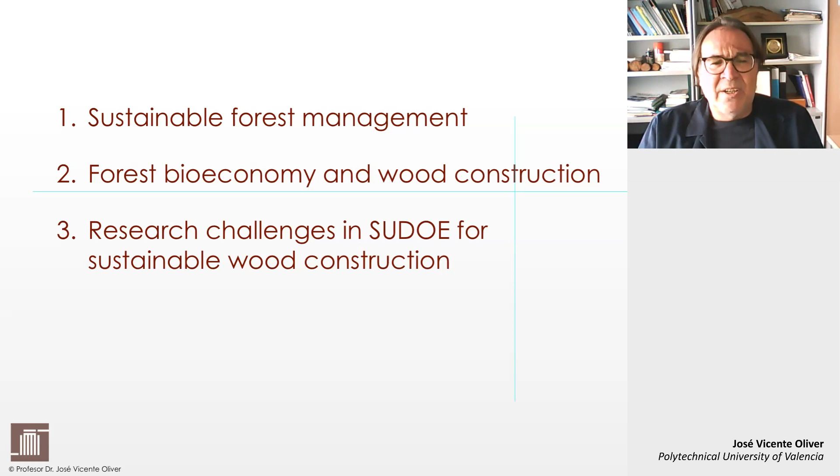So if we begin with sustainable forest management, we have to go back to 1713 with Hans Carl von Carlowitz publishing his book about Sylvicultura Oeconomica. That means the first publication regarding the forest sustainability principle.

Von Carlowitz was a mining engineer working in southeast Germany, in Saxony, and he had deforested quite a large area in order to harvest wood for the building of the mines in this area. And knowing that the forest was growing, he thought about the possibility to plan no more harvesting than growing, and that was the principle of sustainability.

And in this book, we have to take into account that we are speaking with the language of the 18th century. Von Carlowitz said, for the protection and cultivation of wood, a lot of art, science, and effort are required to ensure a continuous, permanent, and sustained use. And here comes the word sustainability, what in German is Nachhaltigkeit.

It is an inalienable issue without which the country, in its essence, will not be safe. When forests are ruined, income is lost for many years, and von Carlowitz spoke about 50 to 100 years, ruining the treasury, leading to an acceptable short-term profit, but masking a loss that cannot be replaced.

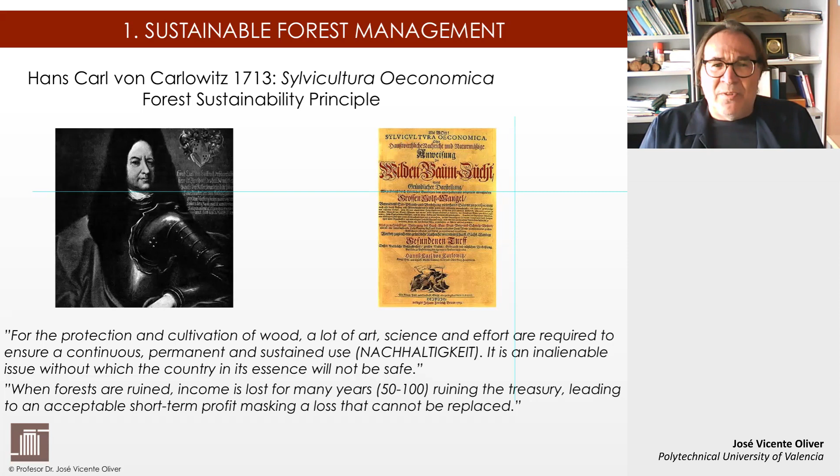So, von Carlowitz described as first technician the principle of sustainability, but from this beginning of the 18th century until today we have different milestones in the development of the principle of sustainability. Sustainability was at the beginning strongly related with the sustainable management of natural resources, in this case especially the forest resources.

But coming to the 20th century, we began different publications and new ideas about sustainability that began maybe with the famous book of Carson, 1962, Silent Spring, over the Ramsar Convention about the protection of different ecosystems, 1971, or in the 80s, 1980, with the World Conservation Strategy, and also 87 with the Brundtland Report about our common future.

And one very important milestone was the Earth Summit in Rio, Declaration on Environment and Development, in the year 1992. The Kyoto Protocol 97 was also very important in order to merge natural conservation and the first approaches to tackle climate change. Different international events have reinforced this sustainability principle.

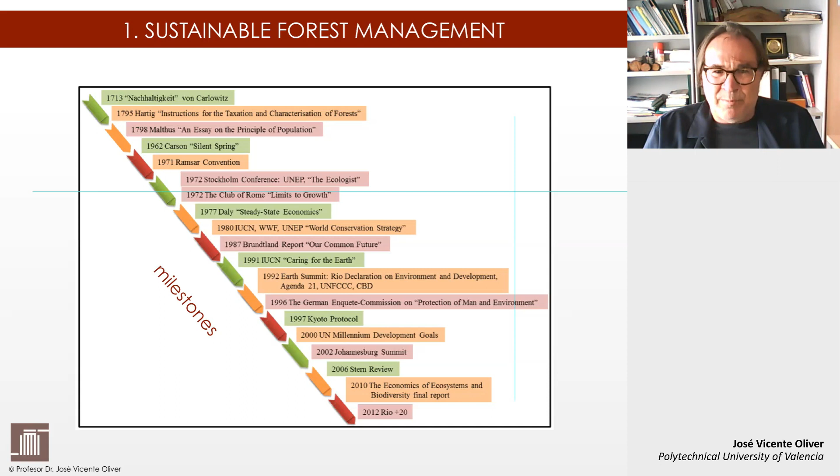Sustainability or sustainable forest management is also quite related to the recent policies against climate change. We had, as you maybe know, a lot of different international meetings in the Framework Convention on Climate Change of the United Nations, what is known as the COP meetings, since 1995 with COP1 to today with COP26, the last

meetings at international level. Very interesting is that especially in COP26 in Glasgow, we saw the first clear relationship between forestry management and climate change. And in this international convention, there was a very important Glasgow Leaders Declaration on Forest and Land Use. It was in year 21.

Over 140 countries, accounting for more than 90% of the world's forest, made this declaration in order to work together to halt and reverse forest loss and land degradation at world level with the scope of 2030. 12 countries announced in COP26 a global forest finance pledge to collectively provide more than 12 billion US dollars for forest-related climate finance until 25.

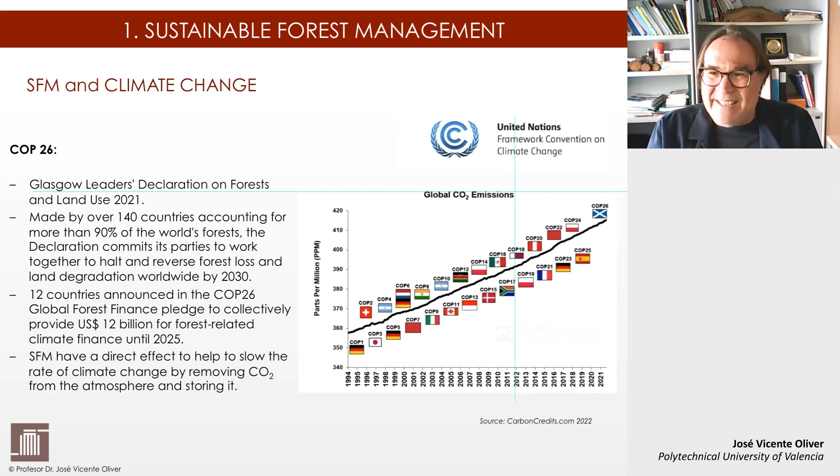And here, I think the most important aspect is that one of the results of this event was that the declaration said that sustainable forest management has a direct effect to help slow the rate of climate change by removing carbon dioxide from the atmosphere and storing it. That means forestry in the center of climate change mitigation, not only adaptation.

Today's definition of sustainable forest management, here a definition from the European Environment Agency, says that sustainable forest management means the stewardship and use of forests and forest lands in such a way and at a rate that maintains their biodiversity, productivity, regeneration capacity, vitality, and their potential to fulfill now and in the future relevant ecological, economic, and social functions at local, national, and global levels, and that does not cause damage to other ecosystems.

So, sustainable forest management is based on the three pillars of sustainability: environmental protection, social and economic development.

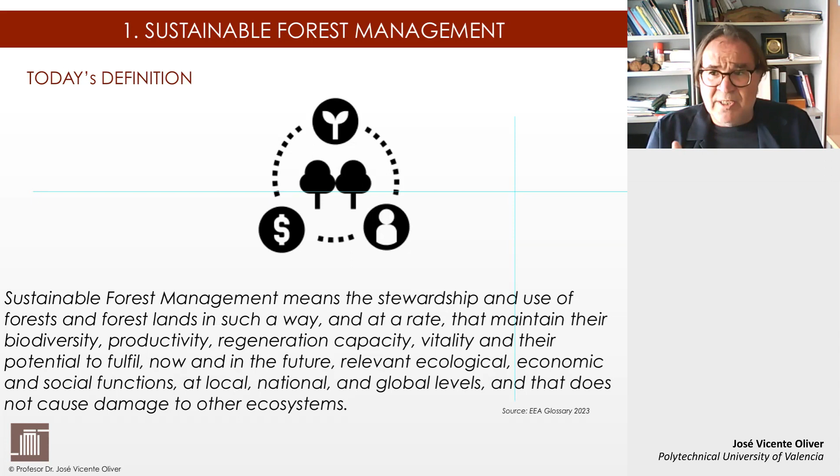Today in Europe, sustainable forest management and the tools that we have for doing that, to make it very easy to understand, is normally oriented to two different models. The first model is what we call the intensive silviculture towards timber production. That means an intensive use of the forest land in order to produce fast-growing trees to achieve large dimensions of wood that can be used especially for forest products or for wood products.

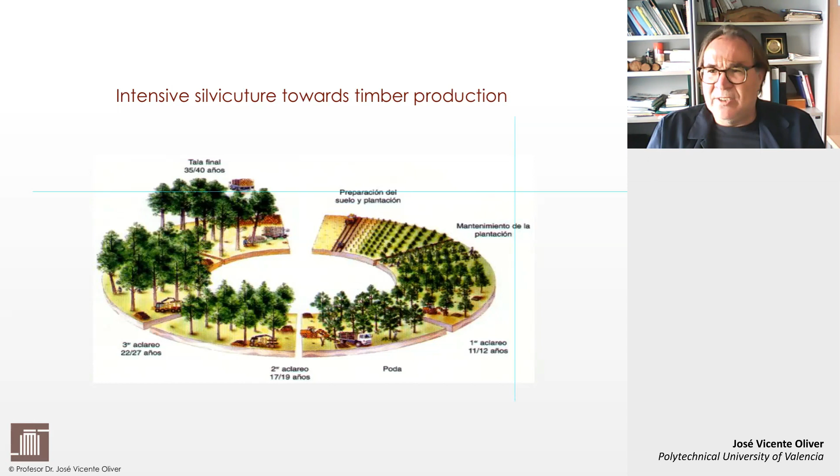That is the model that is very usual in the northern part of Europe, and even here in our area in the southwest, in the SUDOE area, more in the Atlantic area. On the other side, these are combined with another model of protective silviculture towards ecosystem resilience and conservation. That means extensive and very quality-oriented silviculture in order to support and to help the forest ecosystems to be more resilient against natural disturbances.

And here in the Mediterranean area, or in our region in Southwest Europe, more oriented to prevent forest fires, but also to enable these major stands, these major ecosystems, to regenerate naturally and to create the new generation of forests through natural regeneration, and not so with afforestation or reforestation that we saw before in the other intensive silviculture model.

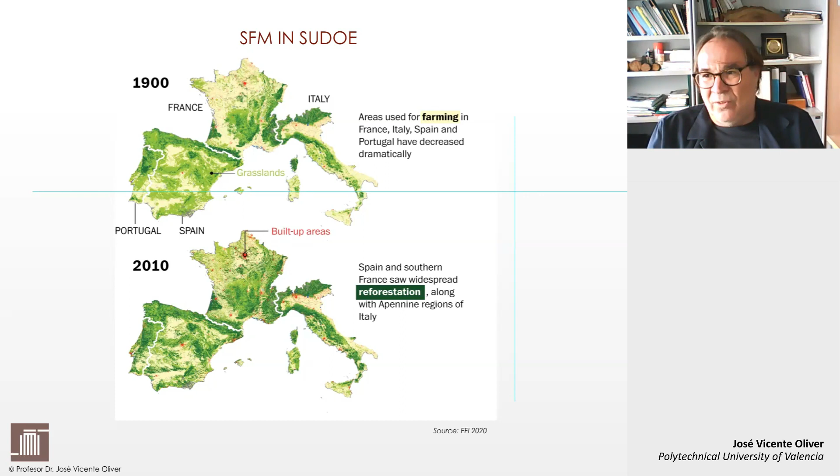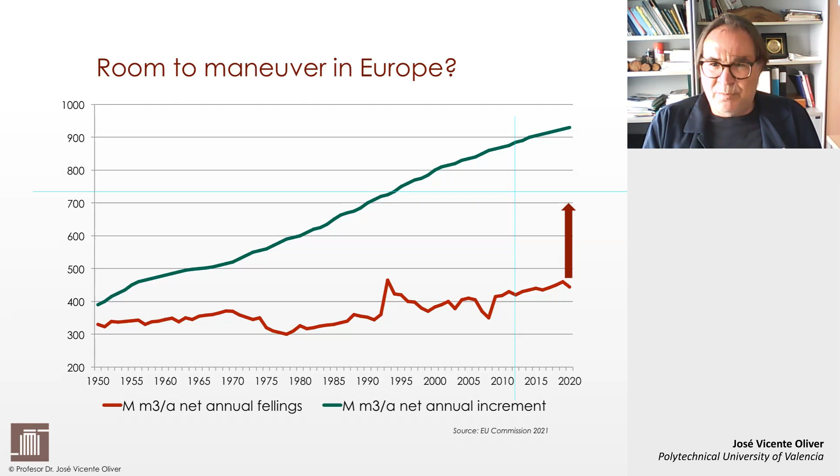If we focus on one representative region of the Mediterranean area of Europe, for example, our region here in Valencia, at the moment we have more than 1.2 million hectares, and the forest cover is almost 60% of the territory. So by far more than the average in Spain and the average in Europe. We have here in our region an annual increase of 3,000 hectares each year. The annual growth is more or less 1 million cubic meters per year for all the forest area. And in our case, we have a harvesting rate of less than 10%. That means that we have large areas that are unmanaged and that are not harvested.

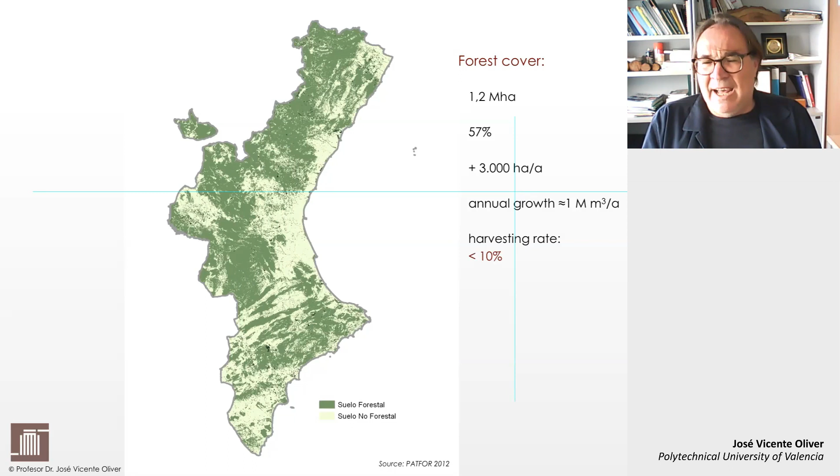But also the severity of these forest fires could be very important in areas with difficult geographical and orographical conditions, and with meteorological conditions, especially in dry and hot summers, to have large forest fires. And that is one of the main perturbances that we could have in order to maintain sustainable forest management and the conservation of our ecosystems, which could be better managed in the future.

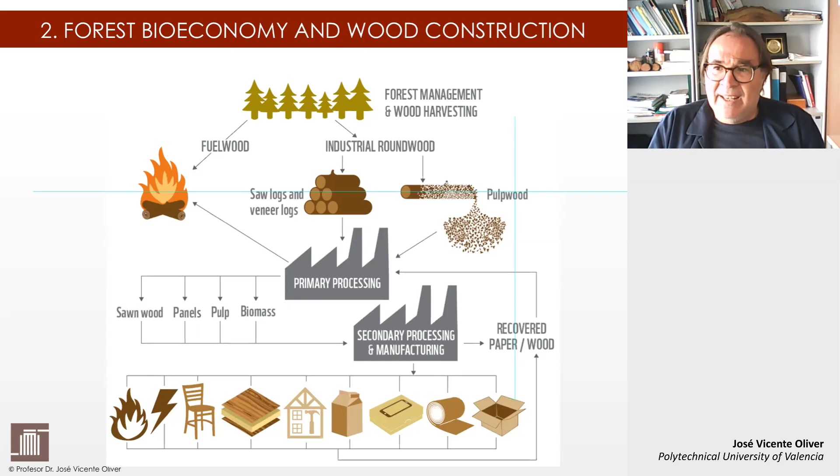On the one side, we have products that are oriented to the construction sector, construction, but also furniture and joinery. Then we have the packaging sector, the paper sector, and also the advanced use of bioenergy, both as thermal energy or power. Very important in the wood sector is that it is a paradigm, a very good example of what we call the circular bioeconomy, one of the main objectives of the Green Deal and the industrial and environmental policies that we have now in the European Union.

As you can see here, the forest is absorbing carbon dioxide from the atmosphere, fixing it into wood, and this wood is used in these logs that we are harvesting from the forest to produce these first semi-elaborates in the primary processing. But during these processes, we are not only producing these semi-elaborates, we are also producing what we call rests. Rests, not waste, wood parts that are not part of this semi-elaborate. These rests are recovered and included in one main use in the primary processing, which is the wood-based panel industry.

The semi-elaborates are passed to the secondary processing, the furniture manufacturing, the construction elements manufacturing, the packaging elements, and so on. And they are producing the final products that we are consuming as society. Also, during this secondary manufacturing, we are creating rests. And these rests are recovered by the primary processing, as I said before, especially in the wood-based panel industry.

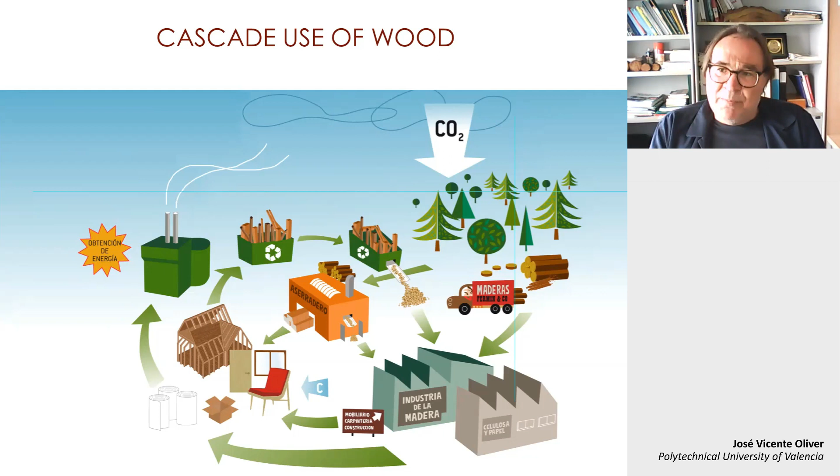The final products, as you can see in the slide, have a life, and after that life, they have two possibilities. Either they will be recycled and integrated back into the industrial production chain, back to the primary processing, especially in the wood-based panel industry, or some of them are landfilled or recovered as thermal energy. This happens in the solid wood chain, but it also happens in parallel in the fiber-based chain in the paper products.

So here is another slide in order to clarify what we call the cascade use of wood. That means that all kinds of resources that we are harvesting in the forest are optimized in their use, following not only the qualitative and quantitative dimensions, but also the possibility to enhance all the particles of wood in different uses. So, for example, large dimensions and very good qualities are oriented to produce solid wood or veneer products.

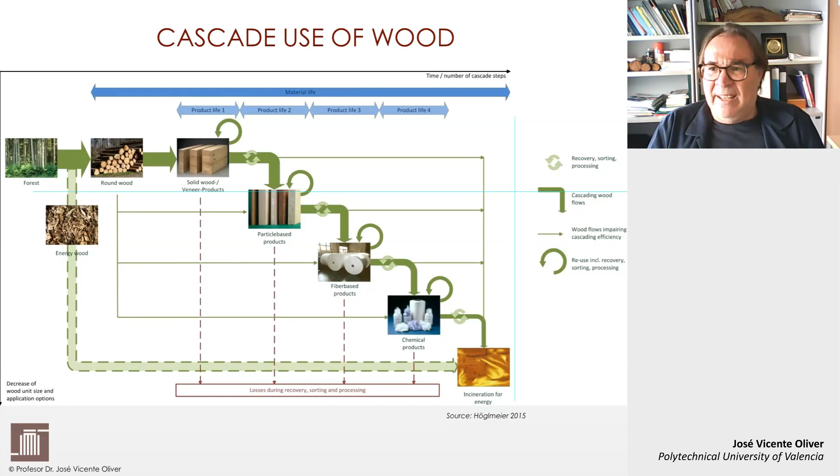Smaller dimensions and lower qualities are oriented to produce particle board products or other wood-based panels, even also fiber-based products like paper. And from some parts of the harvesting and even some rests of the primary and secondary processing industries, we can also use some chemical products in order to achieve high added value products. You see here that a lot of these transformation processes have different cascading material flows, but they are also including both recovering and recycling after end of life.

Another aspect that is very important to understand in the wood sector towards a sustainable construction is what we call the added value in the forest bioeconomy. We can produce a lot of products, high volume, but with low value, or we can focus on some products that have not so much volume, but have a high added value. And that is what we call the forest bioeconomy pyramid. At the bottom, we have the bioenergy.

Clearly, we can use all the wood in order to burn it and convert it into energy, but this does not bring so much added value. It's much more efficient to use the raw material that has enough quality and dimensions for other, more added value uses. And better than energy is for sure all the solid wood uses. That means construction, furniture, packaging, wood-based panels, biomaterials, bioplastics, biopolymers, and engineered wood products that are now developed in the different sectors of the wood industry.

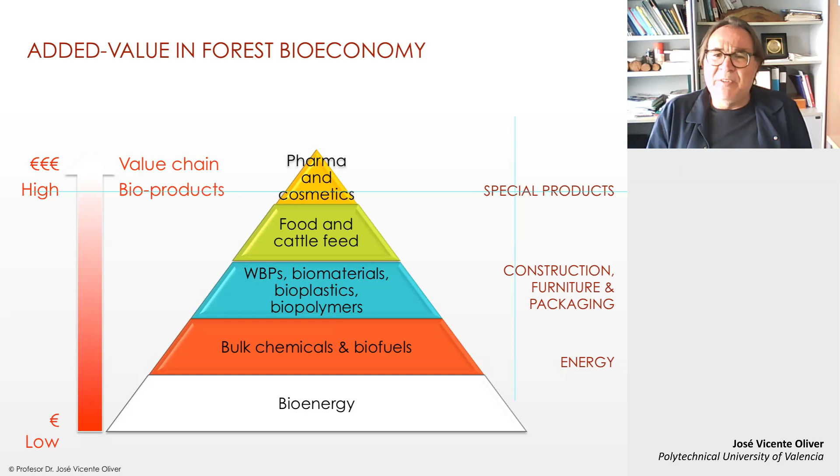And on the top of the pyramid, we can see the special products that we can also produce from different parts of the trees, oriented to the food industry, but also to the pharma and cosmetics industry, with very high added value. So, bioeconomy, cascade use of wood, high rate of recovering and recycling. We are dealing here with the most important industrial sector in Europe that includes the circular economy. In this case, a circular bioeconomy, because we have loops of recycling and recovering in almost all the steps across the different value chains that manufacture different wood products.

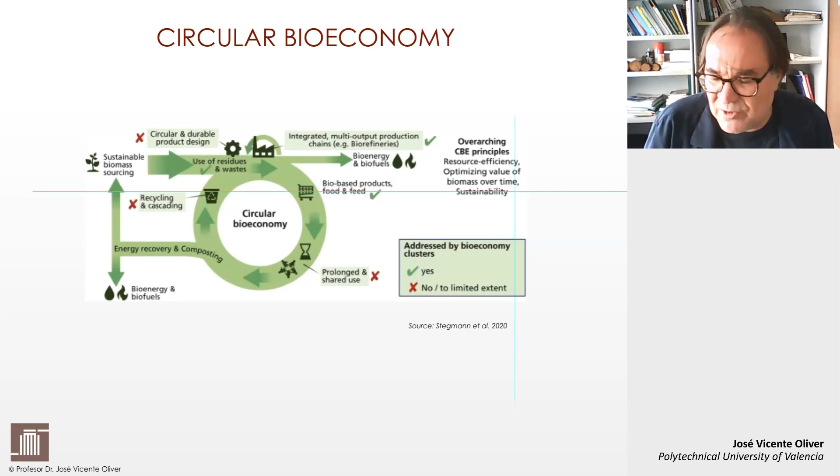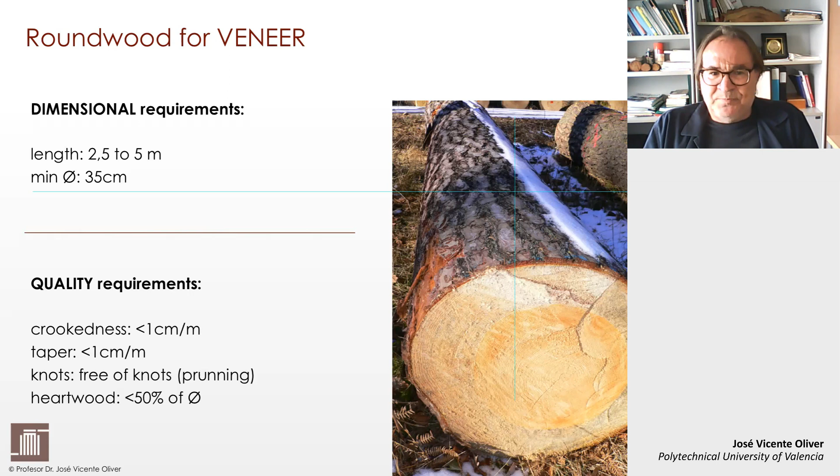What we are doing with this kind of logs after the veneer mills is different products that we can use today in construction. You maybe all know what plywood is, different layers producing wood-based panels that are very homogeneous in their physical and mechanical characteristics over the whole surface. But we are also producing now laminated veneer lumber, also called Microlam, in order to enhance the bending strength, the modulus of rupture, and use it also for structural elements.

Not so much in Europe, but in the United States and Canada, Parallam, that means parallel strand lumber with parts of veneer, can also be produced for structural uses, for beams, as you can see in the figure. And today, I-joists combine, for example, LVL or Microlam in the flanges with different panels in the middle.

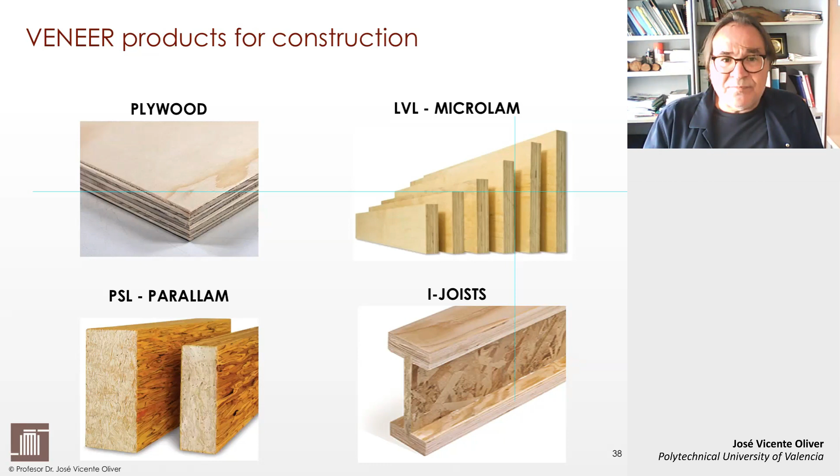If we go further with our classification of roundwood towards products for use in sustainable wood construction, we come to conventional sawn timber, that means large sawn timber. The dimensional requirements for such logs to be used for sawn timber for construction are a minimum length of 4 meters and a minimum diameter of 30-35 centimeters. The quality requirements are a crookedness of less than 3 centimeters per meter, taper of less than 1 centimeter per meter, and the knots are very important because they directly influence the final quality, giving a better or worse structural classification of the sawn material.

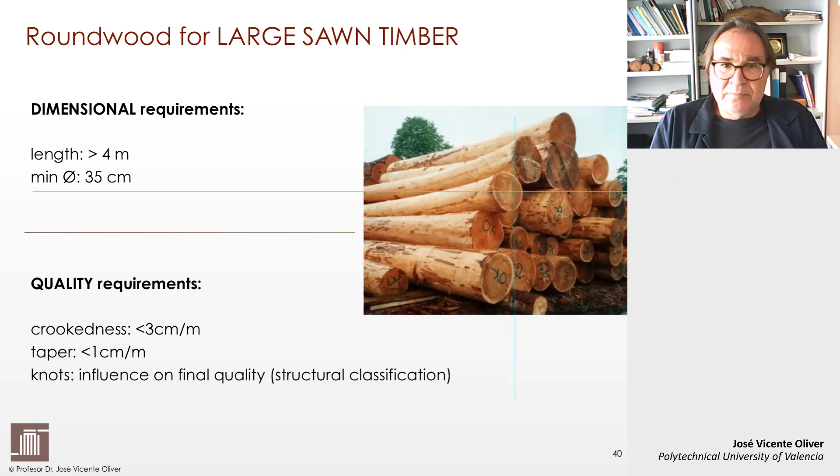Large sawn timber products for construction are developed and produced in sawmills. Sawmills have different sawing programs in order to obtain either planks or boards. Planks are sawn products that have a thickness of more than 50 millimeters. Boards are sawn products that have a thickness of less than 50 millimeters. Planks are more oriented to construction purposes. Boards are oriented to other uses, for example, joinery and furniture, but today also for construction purposes, as we will see.

Here is a typical classification of thickness and width of different sawn products oriented to construction. You see that the thickness can begin with 12 millimeters; we could have boards of 12, 16, 19, 22, 25, up to 50 millimeters. And then we have planks of 50, 63, 75, which is very common, or 100 millimeters in thickness. So the main classification of sawn timber is done by thickness.

Related to the thickness, we have also the width, and you can see very typical products that we are using in construction. For example, very clear is the plank of 75 millimeters thickness by 150 millimeters width. The lengths are variable, but normally they depend directly on the design of the different buildings.

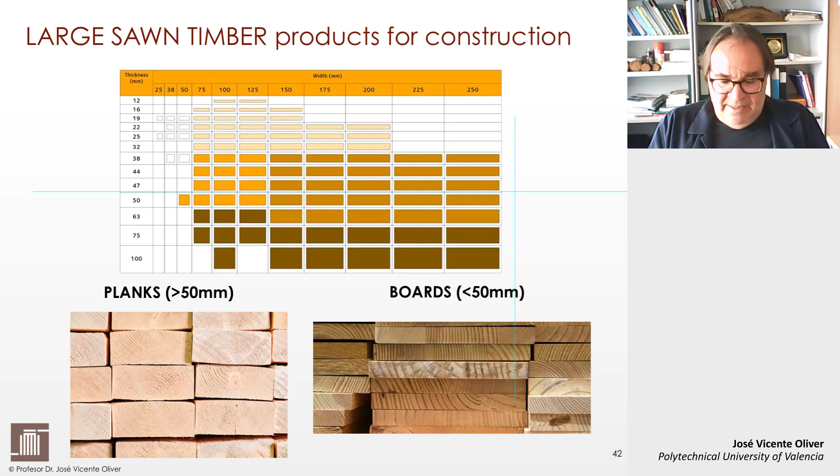Large sawn timber products for construction are normally classified by structural strength classes. Here you can see the table of strength classes of softwood following the European standard EN 338. The strength classes are C14 to C50: C14, C16, C18, C20, 22, 24, 27, 30, 35, 40, 45, and 50. What does this 14 to 50 mean? That is the bending strength, the modulus of rupture, in newtons per square millimeter, that means in megapascals.

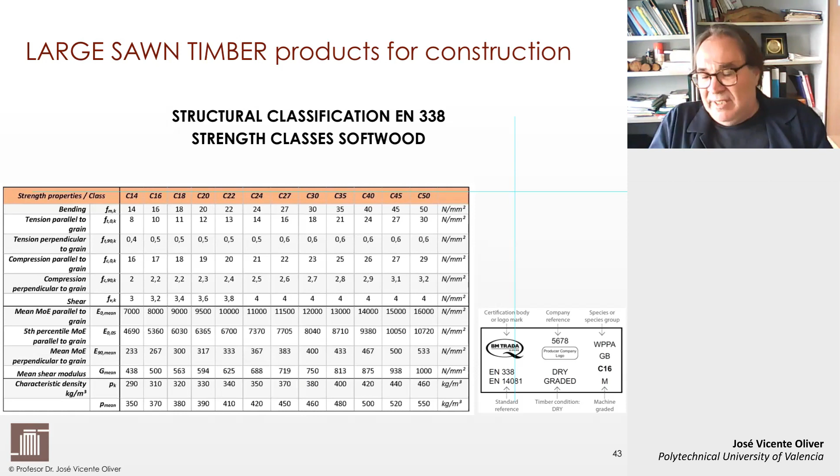So if we want to classify sawn timber for use in construction, and our structural solution needs at least a minimum of 30 newtons per square millimeter of bending strength, we have to use C30 or even more. Normally, the wood classified in these strength classes is marked with the logo of the certification body, the standard reference, the strength class, and the wood species in this package, in this group of sawn timber.

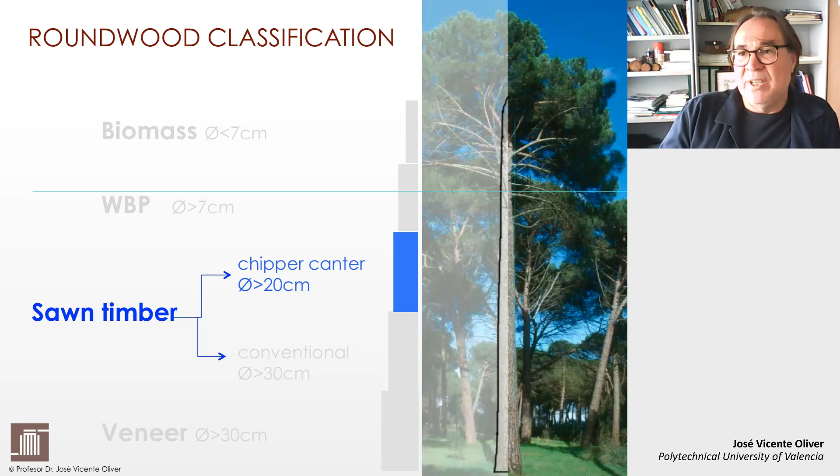So if we go up in our classification of roundwood, we see that we have not only very large and good dimensions for veneer, and very good dimensions and qualities for conventional large timber. We also have smaller dimensions that we can use as small sawn timber. For producing small sawn timber products, the dimensional requirements are a minimum length of 2.5 meters and a minimum diameter of 15 to 20 centimeters.

The quality requirements are also a crookedness of less than 3 centimeters per meter length, a taper of less than 1 centimeter per meter, and the knots are the main structural element inside the wood that influences the final quality. And here, not for the final construction elements, but for the structural classification of the lamellas of, for example, glulam, or even for packaging uses, for example, pallets.

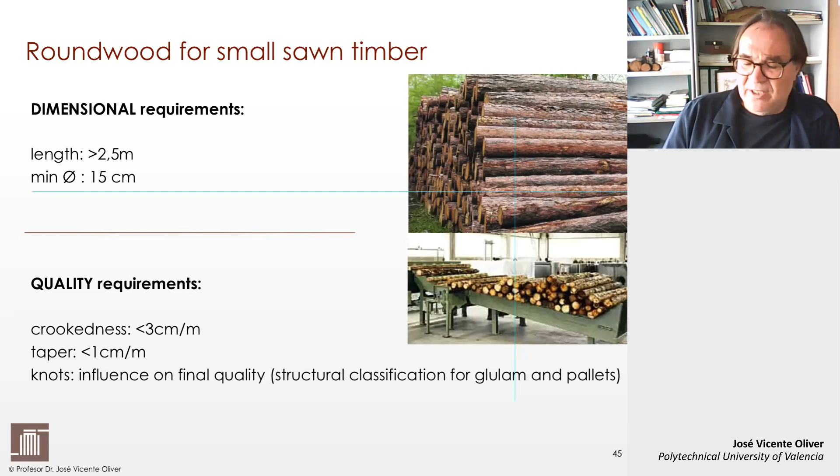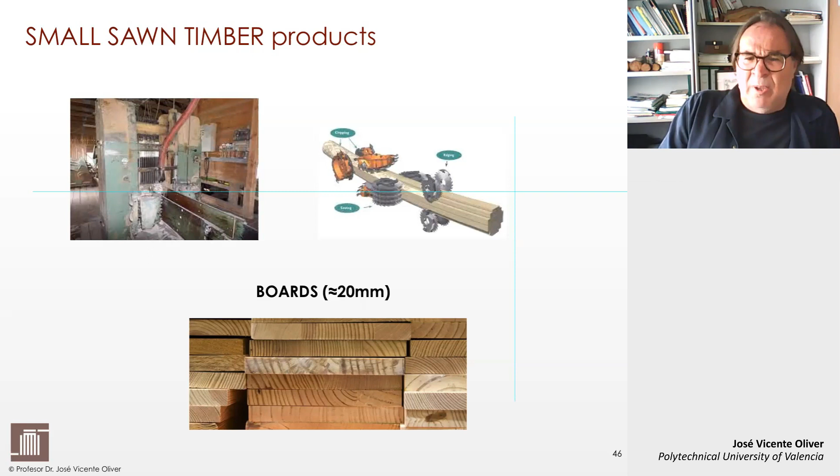Well, normally the small sawn timber products are boards, and boards are around 20 millimeter thickness, can be a little bit more or even a little bit less than this thickness. For what uses are we performing with these boards? Well, one very important use in our country, in this case in Spain, but I think everywhere now in Europe, is pallets. Pallets are by far very important products of this kind of, let me say, small dimensional sawn timber. And we have increased during the last decades our production in pallets very, very drastically.

So we here in Spain are producing around or even more than 600 million pallet units per year. As you can see, the composition of this kind of pallets are boards or slabs that have a length of 1.2 meters, that have, if you want to classify them and to certify them as Euro pallets, so as high qualitative pallets, at least 20 millimeters thickness, and the width, well, depends, but it's between 100 millimeters and 150 millimeters.

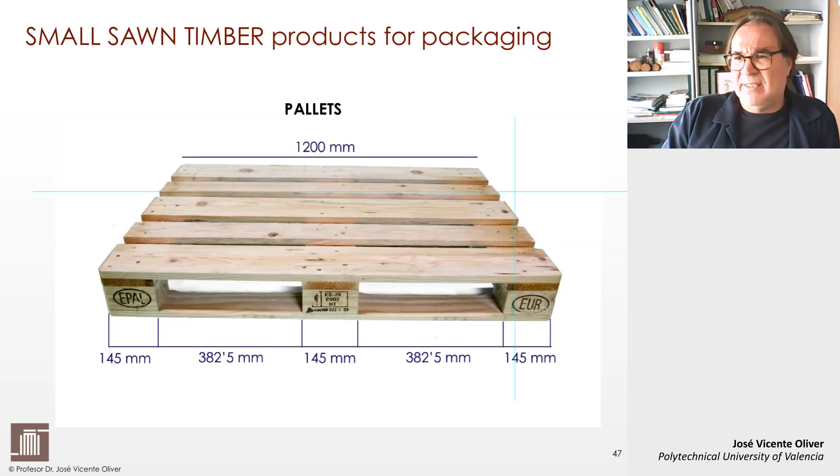So those are the typical sawn products that our sawmills are producing today, with softwood, with pines, with Mediterranean pines that we have here in the Iberian Peninsula or in the southwest part of Europe. That is good because a lot of sawmills that are small and medium-sized enterprises, most of them located in rural areas, are surviving thanks to this activity. So it's a product with not so much added value, but with a possibility to put it in the market and to, let me say, survive the sawmilling business.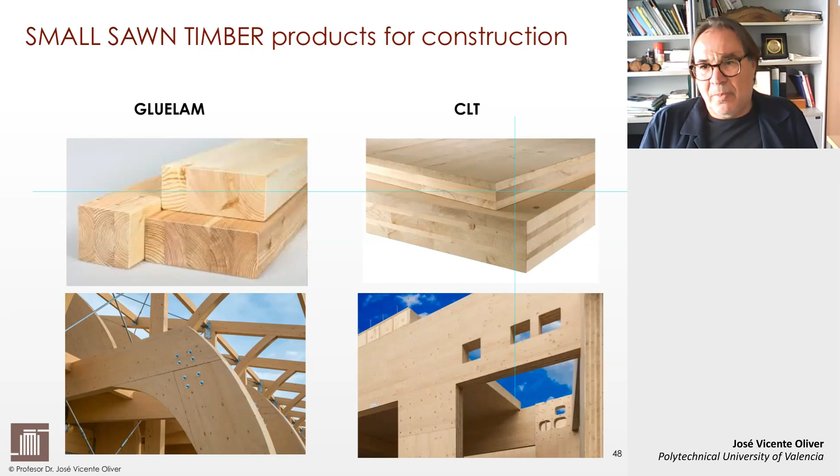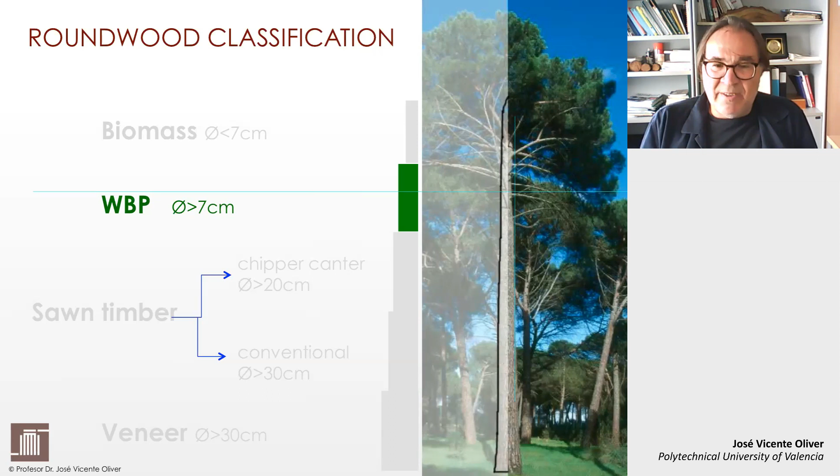So, following our classification of the roundwood, and not having enough quality and dimensions for sawn timber, we are coming to the classification of roundwood for wood-based panels. Here, the dimensional requirements are much easier. The minimum diameter should be, in any case, more than 7 centimeters. And the length should be more than 2 meters, normally 2 to 2.5 meters. For the quality requirements, all qualities are accepted for the manufacturing of wood-based panels, but we have to avoid rotted wood or decayed wood.

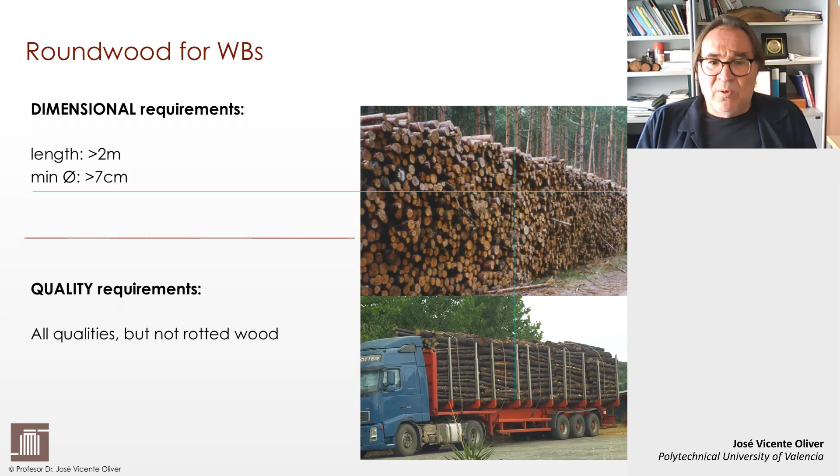So the wood-based panels can be supplied by roundwood from the forest, but nowadays they are also supplied by recovered or recycled wood coming from the different primary processing and secondary processing, even recycled final products after end of life, as you can see here also in the figure. Recovering and recycling is very important for some wood-based panels, especially for the particle board or chipboard, which is one of the main boards that we are using, not only in construction, also in furniture or in joinery.

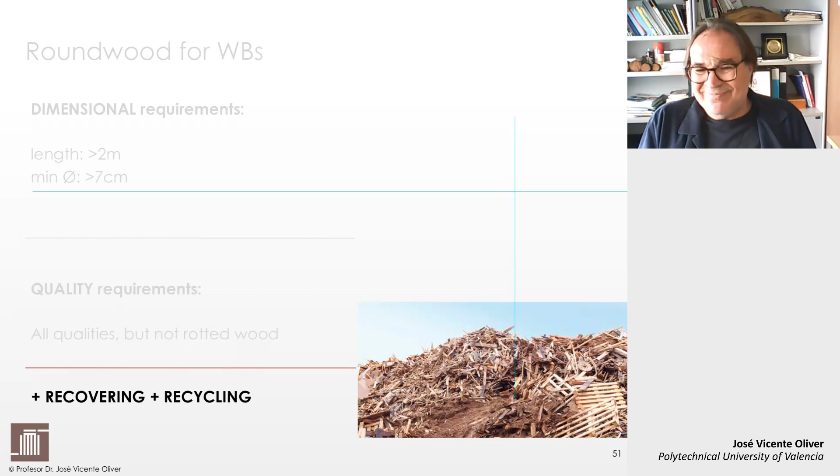Here you can see the most important wood-based panels, the chipboard or particle board. I know that it is one of the main panels, and by far the panel that is most used in the whole wood sector. But we have also the medium density fiberboard, all the fiberboards that are also used for different uses, especially in furniture and in joinery.

Both chipboard and MDF were traditionally developed and manufactured here in Europe, but for 20-30 years we have also integrated in our wood sector the production of oriented strand board, also called OSB, that you can see on the left side of the slide.

Oriented strand board was used before in North America, and nowadays is used more and more in construction, also replacing especially plywood due to the lower quality requirements that OSB needs in comparison with the high qualitative requirements needed for the manufacturing of plywood. That means OSB is a cheaper material, but with very important and very interesting mechanical performance.

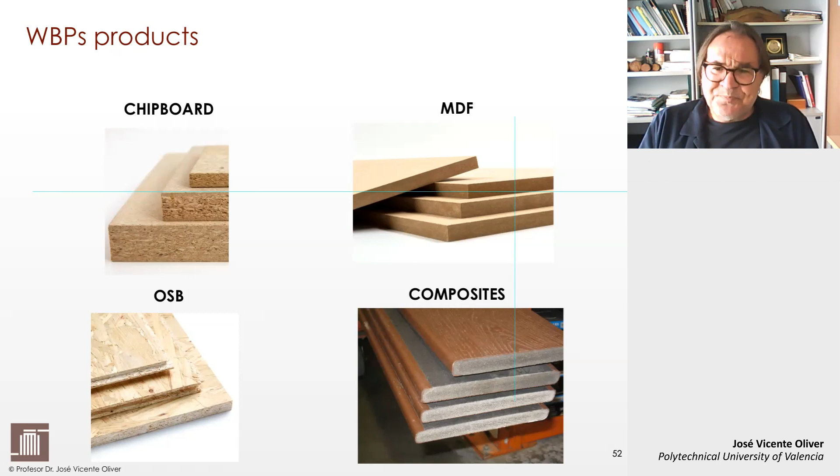So, taking all this into account, in the IMIP project, we started from the point of analyzing what kind of resources we have in our SUDOE area, and what we can do in order to make an autochthonous solution or even smart sustainable construction based on materials that we have here at our disposal. And we thought that our sawmills are sawing especially softwood in small dimensions, as we saw before, for pallets, that can be used for cross-laminated timber.

These autochthonous softwood species are especially Pinus pinaster, Pinus halepensis, Pinus nigra, Pinus uncinata, and other pines that we have here in the Iberian Peninsula. On the other side, we can also improve our CLT with these autochthonous species, not with the dominant species we have in Europe, like Pinus sylvestris or Picea abies, that means Scots pine or spruce that are dominating the market, but replacing them by our Iberian pines.

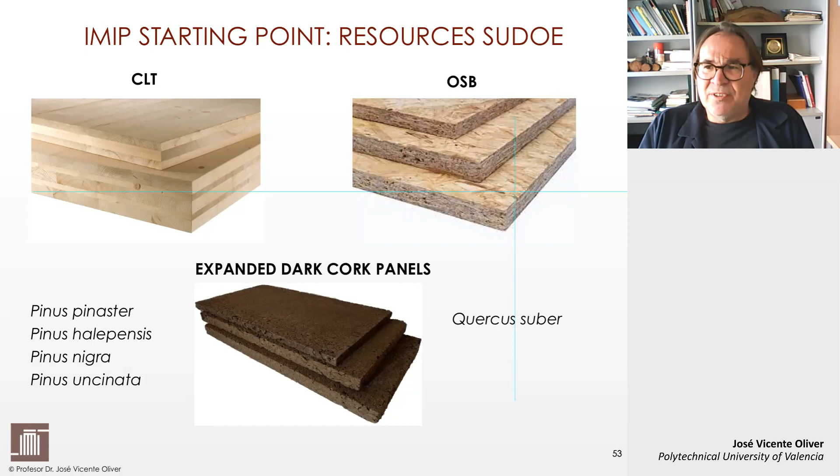Also, some reflections about the trends in wood construction in Europe. The current situation and the forecast is that we have and will have a continued and sustained increase in construction activity in Europe, but more accentuated in rehabilitation, and in public and civil building, than in new residential construction. You can see in the figure below, from Euroconstruct 2020, that the increase in new residential construction is lower than in activities related to rehabilitation or civil building or public building.

On the other side, in this mega trend of sustained increase in construction activity in Europe, we see that wood continues to increase its market share, both in structural elements and also in joinery or carpentry, like doors, windows, flooring, or cladding.

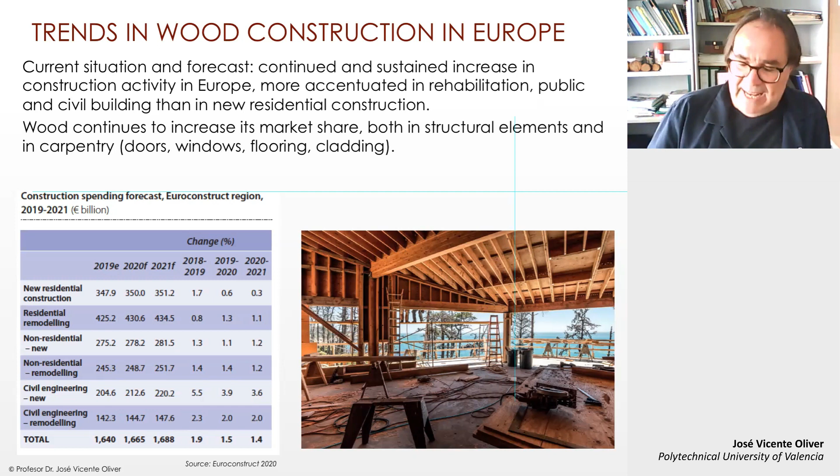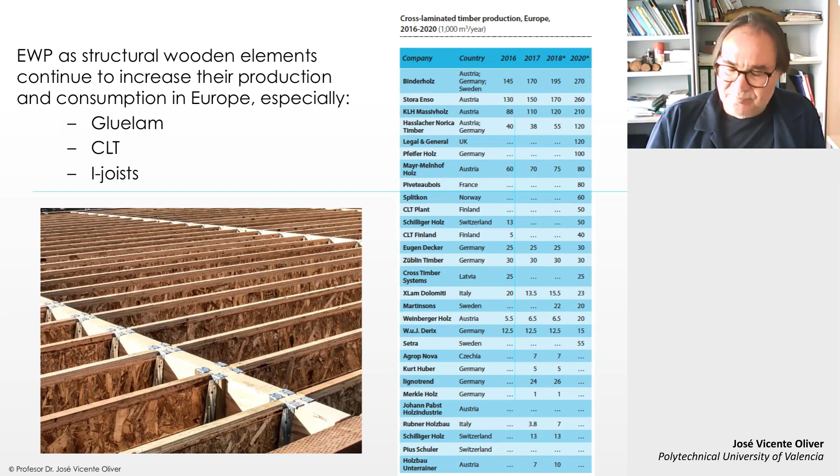Well, those are the trends that we have in construction, but sustainable construction today means also tackling climate change. And building with wood is a very good example to tackle climate change. Wood installed in long-life products, that means in buildings in Europe, is now storing more than 60 million tons of carbon. In our SUDOE area, that means Spain, Portugal, and South France, we have more than 10 million tons of carbon fixed today in different wood products in our houses.

There are 8 reasons that are very important in order to understand how building with wood is tackling climate change. The first is that we are working with a renewable raw material based on sustainable forest management, in comparison to other materials that are not sustainable and not renewable.

The second is that the industrial use of wood stimulates forest management, that means reforestation and the conservation of forest ecosystems. Where we have a good forestry wood chain, in which the forest owners are getting revenues from the production of wood, forests are maintained, forests are managed, forest ecosystems are conserved and protected. The third reason is the carbon sink, the storage of carbon fixed in wood by the trees.

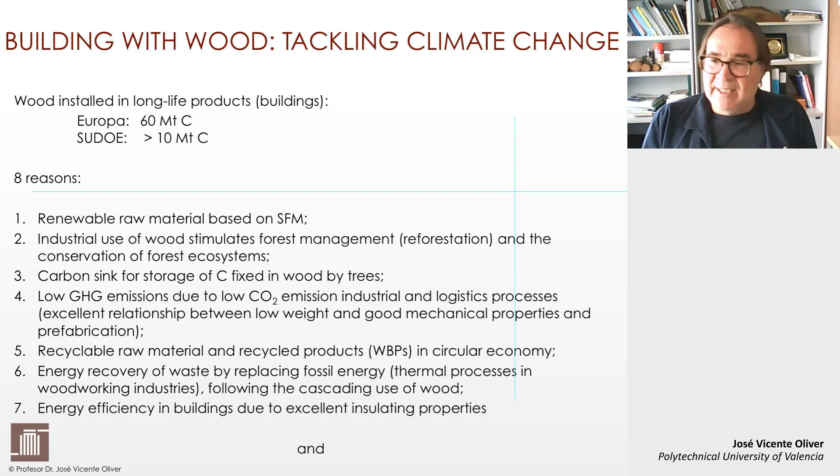A sixth reason is energy recovery of waste by replacing fossil energy, that means thermal processes in woodworking industries following the cascading use of wood. Seventh is energy efficiency in buildings with wood, due to the excellent insulation properties that wood and wood products have. And last but not least, what we call the triple effect of substitution of other construction materials.

That means replacing materials with high carbon dioxide emissions, for example, plastics, but also steel, aluminum, and even concrete, has three effects that are very important to be aware of. The first is the reduction of emissions in production and logistic processes. The second is the increased recycling rate. And the third is the lengthening of product life cycles.

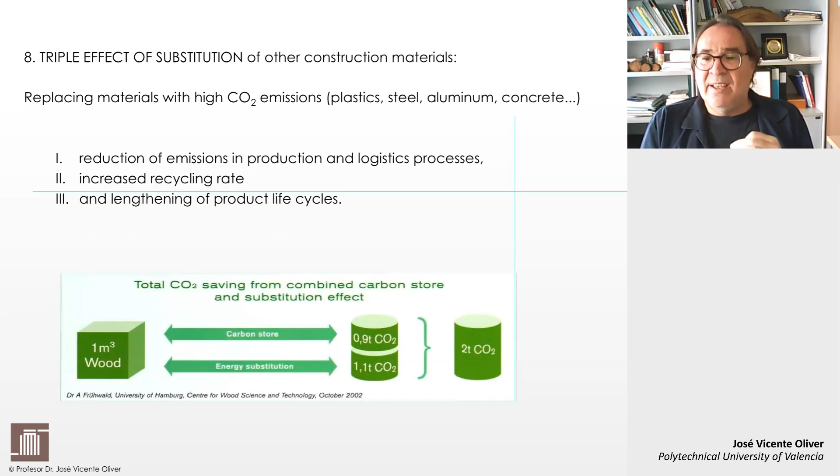Following COST Action, a coordinated research action that we had between 2001 and 2005 in Europe, coordinated by Professor Frühwald in Hamburg in Germany, we came to the result that the total carbon dioxide saving from combined carbon store and substitution effect in 1 cubic meter of wood was 0.9 tons of carbon dioxide through direct carbon store and 1.1 tons of carbon dioxide through energy substitution. That means if we are using 1 cubic meter of wood in construction, we are saving 2 tons of carbon dioxide emissions.

Some facts also supporting this contribution to climate change, or this sustainable wood construction, is that wood is a net storage of carbon in comparison with other construction materials, for example with plastics, with PVC, or with metals like steel and aluminium, by far the most emitting material, but also with minerals like bricks or concrete. As you can see here in the figure, wood is the only product that is a net fixer, and all the other materials are more or less emitters of carbon dioxide.

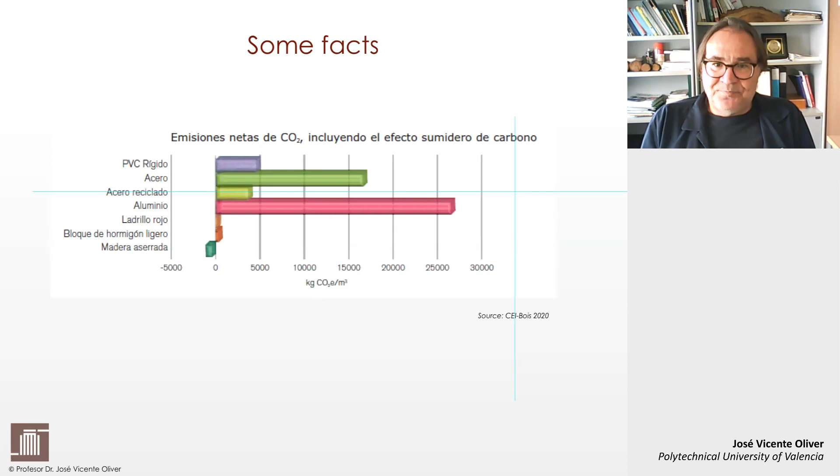That could be seen better here if we analyze the whole life cycle of the different materials. All the wood products like sawn timber, plywood, laminated veneer lumber or LVL, chipboard or particle board, or fiberboard are all fixing carbon and not emitting during the entire life cycle, in comparison with minerals, for example lime, bricks or concrete, that are emitting, not so much, but emitting, or in comparison with metals. Here are the examples of steel and aluminium, which are clear emitters of carbon dioxide during the entire life cycle of the different construction products.

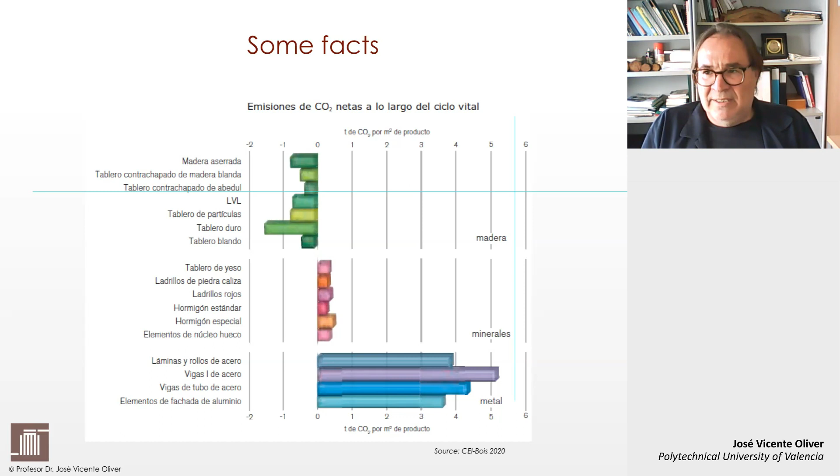If we analyze the time of use of one building, here is another survey done at the European level comparing a wood-based house with a house of concrete and steel. And we see that in the use of the different energy sources, in energy consumption, the house with concrete and steel is emitting 8-10 times more than a house based on wood.

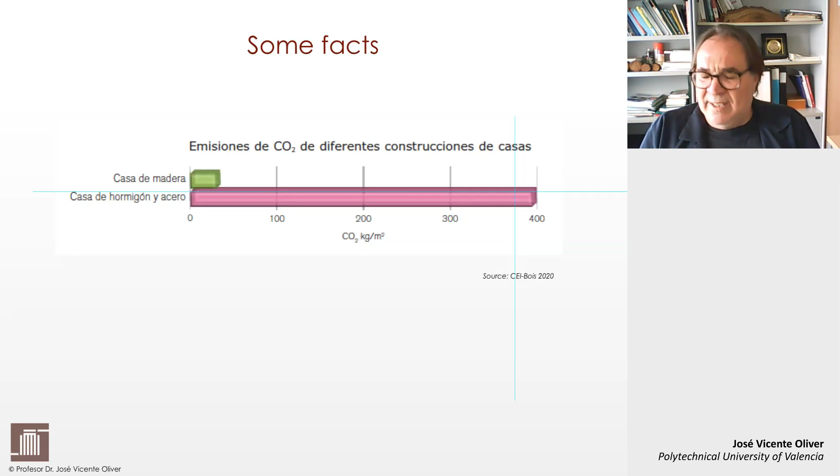Okay. We're coming to the last point of the presentation. After analyzing the key facts of sustainable wood construction, what are the challenges? What are the research challenges in our area in order to improve the use of wood in sustainable construction in the SUDOE area, that means in the southwest part of Europe? Well, during the development of our project we have also analyzed what happens with research in wood and wood in construction in Europe and in the whole forestry wood chain.

We have seen that years ago what we call the strategic research agenda for the forestry wood sector was developed, with a lot of influence from Northern Europe, but also the different European research associations and industrial associations. This strategic research agenda was a kind of lobbying to explain to the Commission the main challenges for future research in Europe.

And after different research framework programs, for example Horizon 2020, but also the former Framework Program 7, the results we could see in the research database of the European Union are that the revenues of the funded projects were very unbalanced across Europe. Northern and Central Europe concentrated more than 85% of the funds, and South Europe only 5% of the funds.

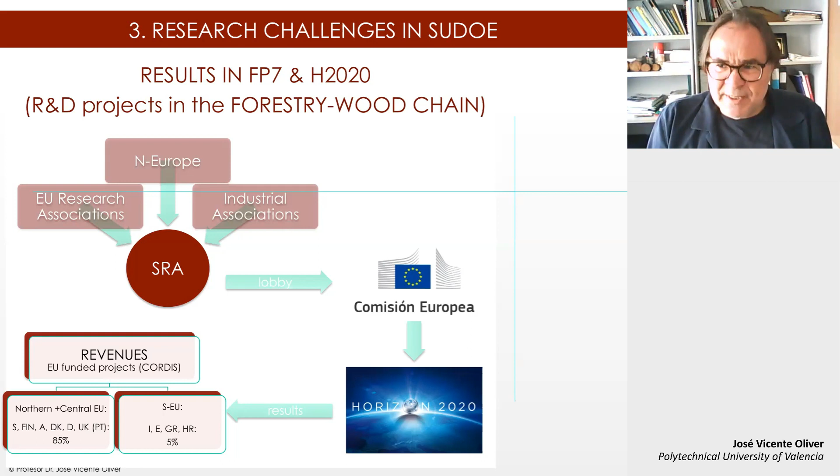So Sweden, Finland, Austria, Denmark, Germany, UK, even Portugal as a small exception, concentrated quite a lot of money in wood in construction research, or wood research in general. And South Europe is very, very underrepresented: Italy, Spain, Greece, Croatia, and France somewhere in the middle. So, taking these results into account, we see that we have what we call the forest paradox in South Europe. It is clear that the Mediterranean forests are very important for Europe.

They are key European ecosystems for adapting to climate change, but also for the mitigation of climate change, for improving the water quality in all the Mediterranean basin, to increase, to maintain and to conserve the biodiversity, which is very, very important in the Mediterranean in comparison with other parts of Europe, and the landscape. But that is on the positive side.

the local industry. The result of the last decades is that today we have in the Mediterranean area, in our SUDOE area, large areas with abandoned sustainable forest management. That means a lot of unmanaged forest. That is also closely related to the rural depopulation of large parts of our countries.

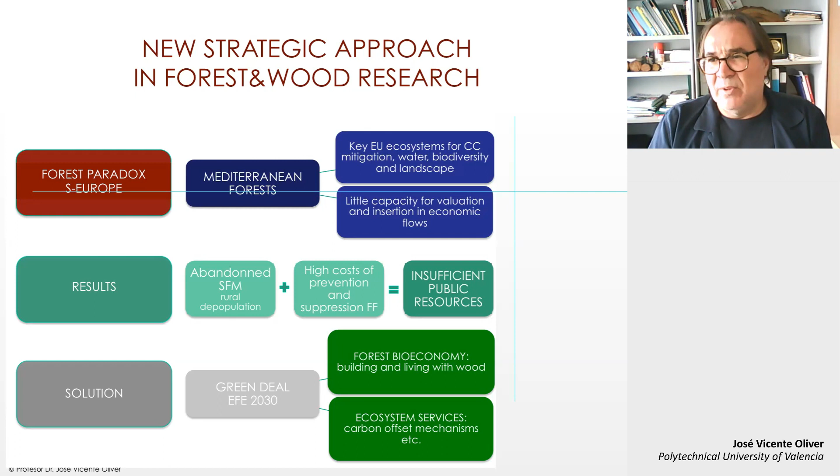On the one side is the forest bioeconomy. That means the enhanced use of wood for building, for construction, but also for living, for furniture and other uses of wood. That is one solution line, and the other is to put into value the ecosystem services, especially the carbon offset mechanisms, but also the quality of water, the quality of the landscape, biodiversity, and so on. But especially the carbon offset mechanisms as an active policy to mitigate climate change and to reinvest in carbon fixation activity in the forest.

So to move in this direction, we have to change our mind and go from a linear forest wood chain to a more circular forest and wood bioeconomy. That means from a typical natural resources industry, to take, to make, to produce, and to dispose, to a circular forest and wood bioeconomy as we have seen before. So we are going this way, and the wood sector is doing it in the right orientation. The vision is that the wood sector, especially the wood construction sector, should be a leading sector in decarbonization and compensation.

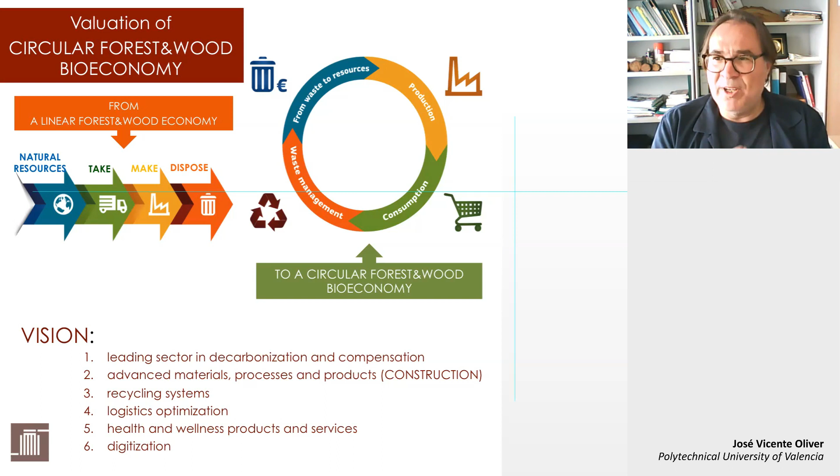We also have to improve and enhance advanced materials, advanced processes and products, especially for sustainable construction. An example is our IMIP project. We have to improve our recycling systems and optimize the logistics, both internal logistics in the companies, factories and industries, and external logistics in the construction field. Also, we have to put in value the health and wellness products and services in our building environments and building solutions. And we have to integrate information and telecommunication technologies, that means digitization.

The decarbonization in wood construction should be oriented in three main axes. First, the sink, the capacity of forests to capture carbon dioxide from the atmosphere. The second is storage, carbon storage in the forest ecosystems and also in wood products. And substitution is also important: the sequestered carbon in wood products, the avoided emissions through replacing emitting materials like metals or minerals, like steel, aluminum, concrete.

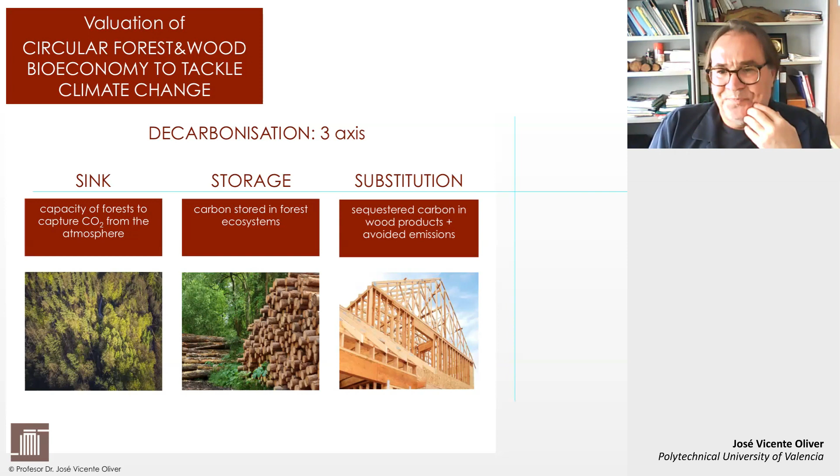So the vision for effective research, technical development, and knowledge transfer between academia, industry, and professionals in the construction sector is to work in sustainable forest management, with the forest engineers, increasing the harvesting rate, which can also help break rural depopulation and contribute to rural development; to innovate in construction in terms of materials, products and processes, as we are doing in this project, in the area of bioeconomy, related to the storage of carbon, but also contributing to the ecological transition, improving the substitution of fossil materials and products through wood-based materials.

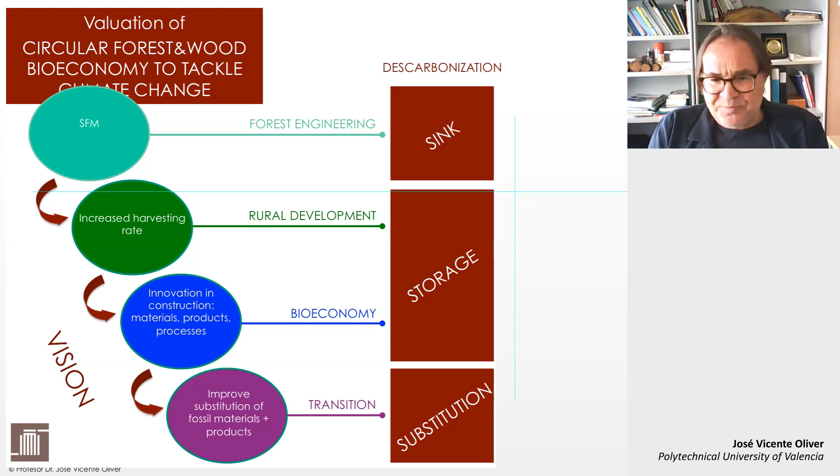The challenges for our research today in different research groups working with wood in Europe are climate change adaptation, addressing growing risks related to climate change like forest fires, pests, snowfalls, and so on; to overcome administrative and technical barriers to increase the rate of wood use, especially in construction, beginning with public buildings; to break the ceiling on value generation for forest products, not only in construction, maybe also in packaging; to improve transparency in the wood market and carbon offset mechanisms,

to mobilize financial investment in value chains of forest products and services, integrating also public support, and now we have a lot of European funds to support that; to clarify and quantify the substitution approach to help make decisions about enhanced use of wood in construction. And also, I will say that it's really important to improve the acceptance of wood by citizens, especially urban citizens.

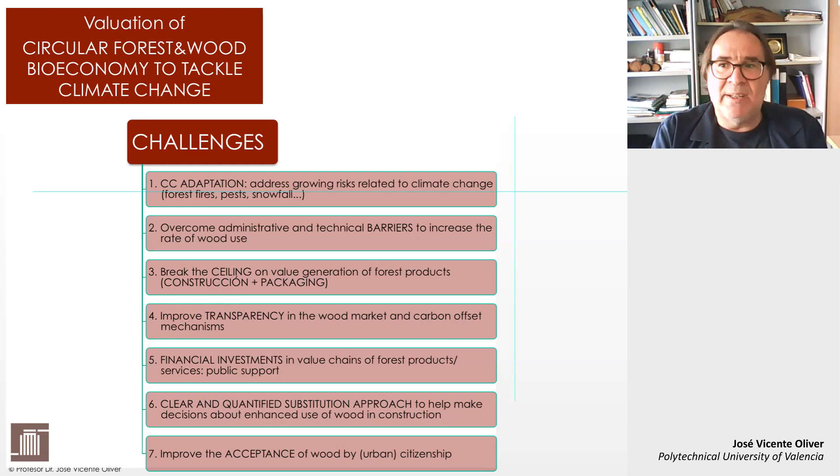So, I'm coming to the final slides. After all we have said during the last minutes in this lesson, what are the real research challenges for 2030? We have a globalization in which we are dependent on product imports, especially in these areas of Europe, like we are, not having so much harvesting rate in the forest, but having an important wood sector.

These globalization impacts are that the prices of wood products are set in international markets based on the performance of the strongest competitors. In the absence of local supply markets, we lack competitive advantages even in low value added products. So we are coming to a net import of wood products. But with innovation to improve the quality of our products and also our services in wood in construction, the challenge is to have a more profitable wood sector with high value added products and services.

In wood in construction in our area, that means enhancing our resources in order to make better prefabrication and better products, for example, cross-laminated timber with our autochthonous species, alternative treatments in order to improve dimensional stability and durability of our wood elements in construction, especially also for outdoor uses, integrating cork as insulating material, not only from the thermal point of view, but also from the acoustic point of view in our buildings.

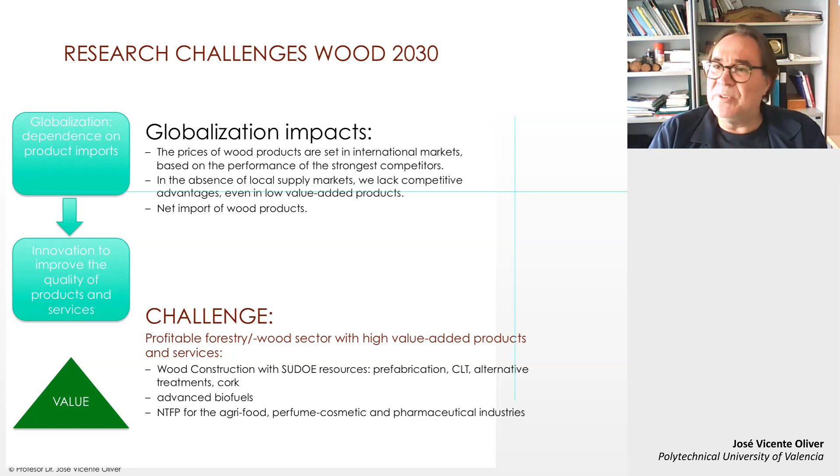And also, as byproducts accompanying sustainable wood construction, using advanced biofuels, also wood-based biofuels, and non-timber forest products for other uses in the agri-food, perfume, cosmetic, pharmaceutical industries, and so on. That brings value. And all this in a transition from a traditional wood sector to a sustainable wood sector based on sustainable wood construction in the 21st century.

And to do that, we have to develop more research, applied research and technological development, and transfer the results in a very good way, both to the prescriptors, that means architects, but also building companies and engineers, and also to society as end users of construction products. And here we have, in this transition, two main drivers: what we call the emerging drivers and the enabling drivers. The emerging drivers are that we now have a good legislative framework on sustainability.

The economic crisis now, after the COVID pandemic, and also now with the Ukrainian war, brings market instability. But we have mature markets for current products. And we are in a situation of changing competitive advantages and evolving value perceptions about natural resources and wood-based materials for wood in construction. We have to focus on sustainable construction. We also have to use the prefabrication possibilities and the trends of do-it-yourself, which with wood is much easier than with other materials.

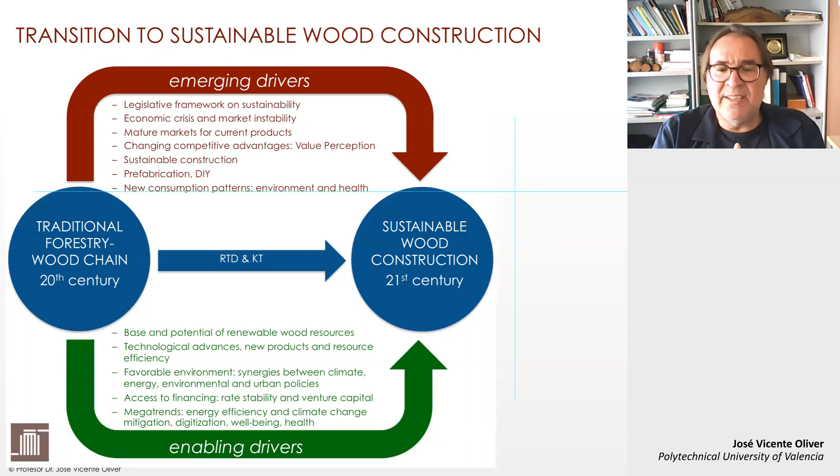And we also have, as emerging drivers, the new consumption patterns, that means environment and health. On the other side, we have enabling drivers: the base and potential of renewable wood resources, technological advances, that means new products and resource efficiency, and a favorable environment with synergies between climate, energy, environmental, and urban policies. Access to financing, we now have rate stability and venture capital, and we are also included in megatrends that are very positive for this transition from the classical wood sector to sustainable wood construction in the 21st century: energy efficiency and climate change mitigation, digitization, well-being, and health.

So I hope you can enjoy other lessons related to the different achievements and results of our project. And I hope this lesson can open your mind to understand the transition to a sustainable wood construction environment, what we need in our SUDOE area.